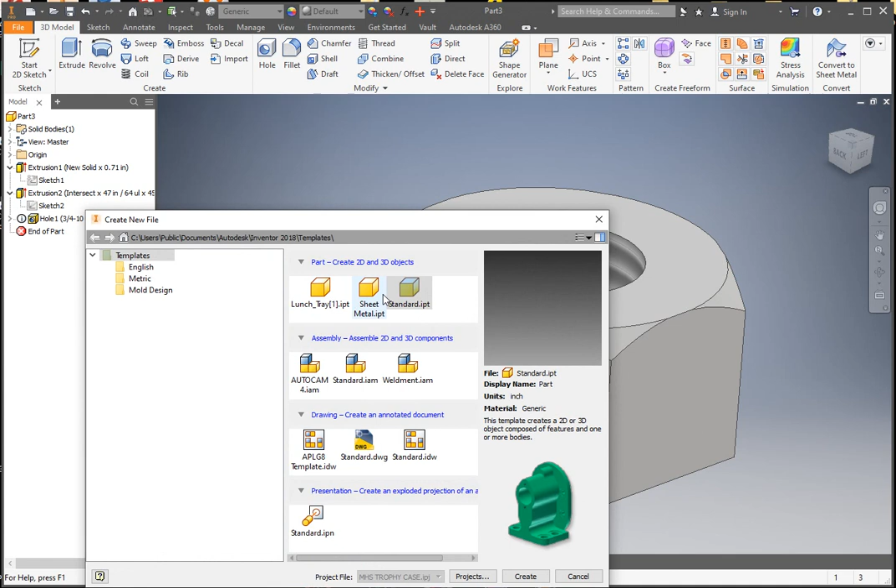All right, so let's take a look at doing this semi-finished hex nut. This is what we want to end up like. So to do this drawing, create a new standard IPT file. And we need to know a couple things. First, we need to know the dimensions.

So let's do a sketch here. I'm going to just rotate it around, and we're going to put in our six-sided polygon, right? Six-sided polygon. Don't really know the dimensions yet, so we'll just stick it in here. If you want to get it vertical, you can put a constraint on it.

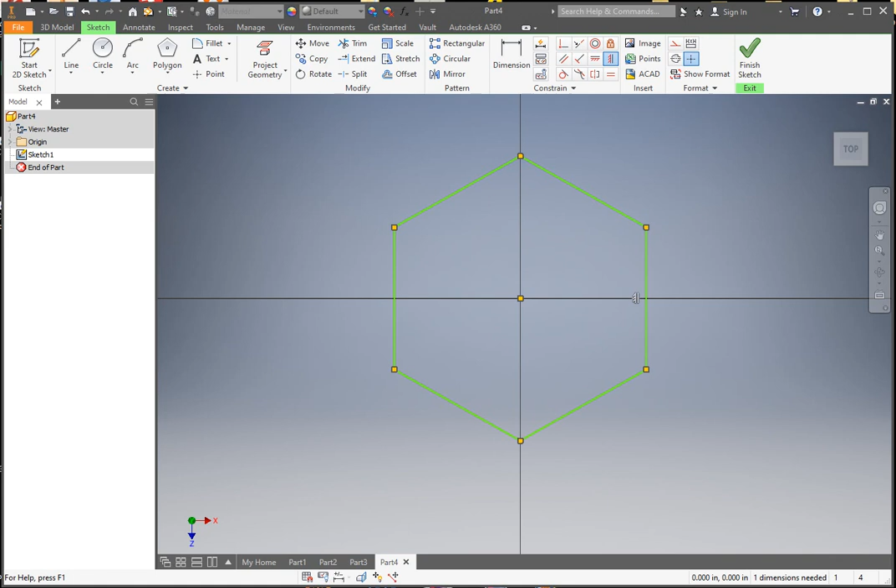That's fine. So all I did was go to the internet and Google semi-finished hex nut and dimensions, and came up with this little chart here. And we're going to be using this three-quarter nut, right? So our width across the flats, our F dimension here, is going to be 1 1/4, and our thickness is going to be 47/64 with a minimum of 0.71, maximum of 0.758. So it kind of gives us a little bit of variance there.

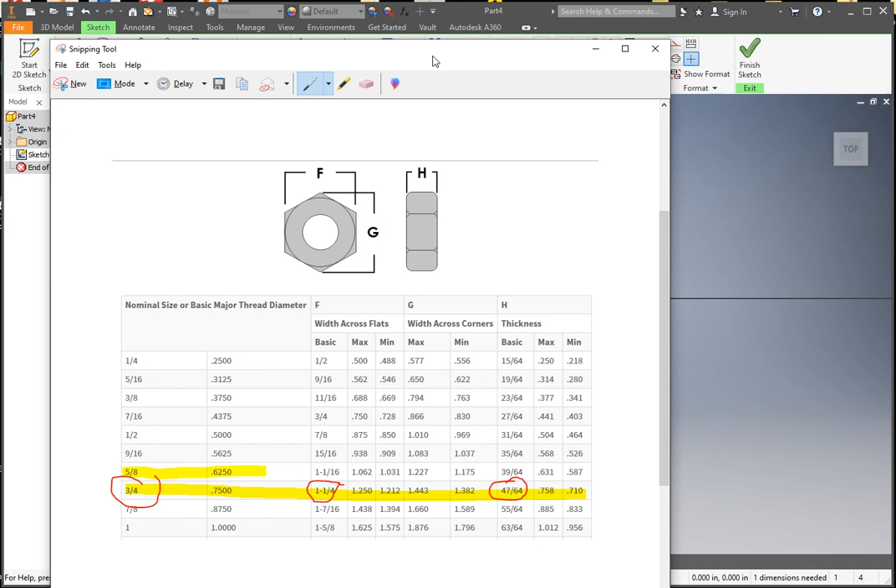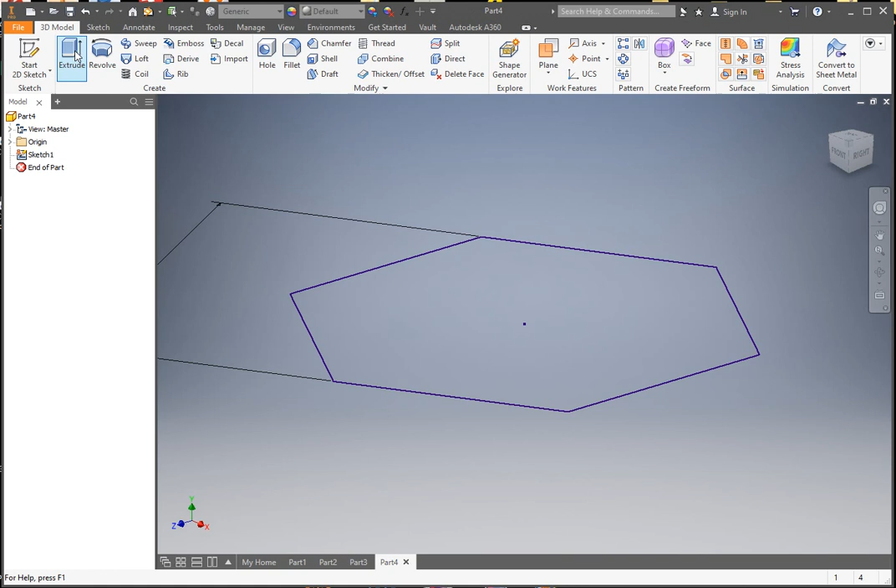So we'll start with these. So we know that across the flats is 1 1/4. So let's do that first. Dimension, flat side to flat side, 1.25, 1 1/4, right? So here is our nut. And our thickness, we finish this. Extrude. You can either put in the fraction, I'm going to put in the decimal, that basic dimension. Okay. So that's the frame of our nut.

Now we got to put on those little beveled edges. And this is the fun part. So we're going to sketch on the top. We're going to create a circle. And we notice in our drawing that it goes almost to the edge, right? So our circle is going to go to one of those flat edges. Be careful where you click it here. You could click it a little bit inside, but let's go all the way to the edge and click it like that. And we're going to finish this sketch.

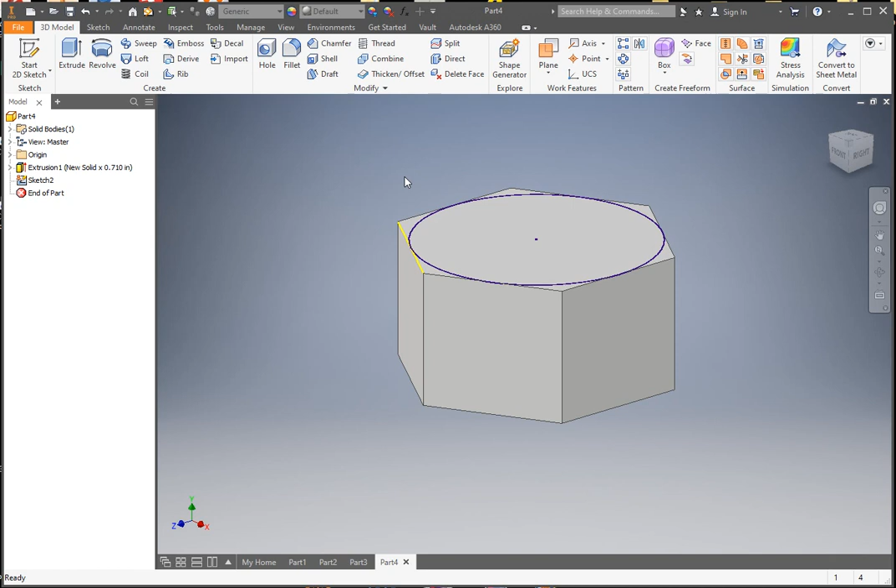Now, how do we get this chamfer here? So this is the way we're going to do it. We're going to create an extrusion for that center part. I can't join it or cut it all the way through, so I can't extrude it. That's not what we want. What we want is an intersection. Just this part here, cut.

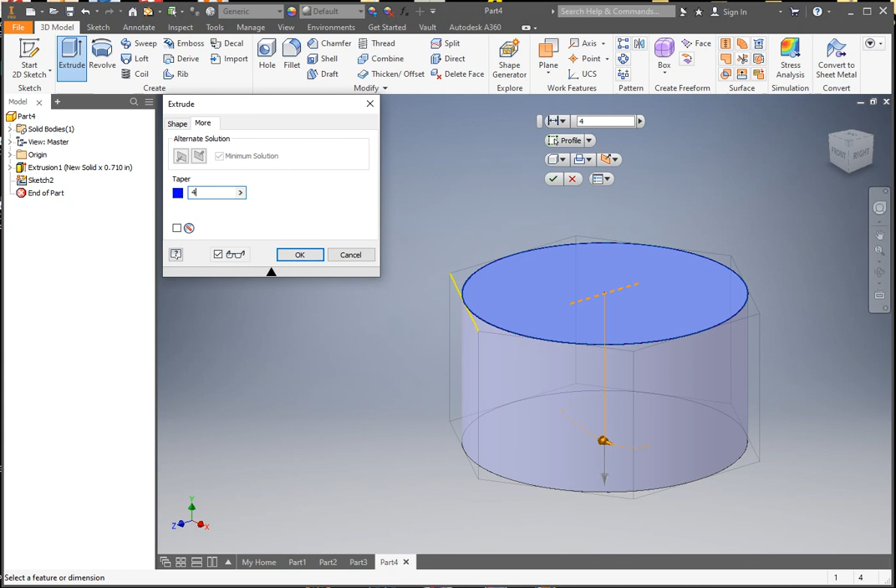But we want to go to the More tab and put it at a 45-degree taper. See where I am? 45-degree taper under the More tab. Hit OK, and that gives us our nice little extrusion. We can put an axis, you know, whatever you want.

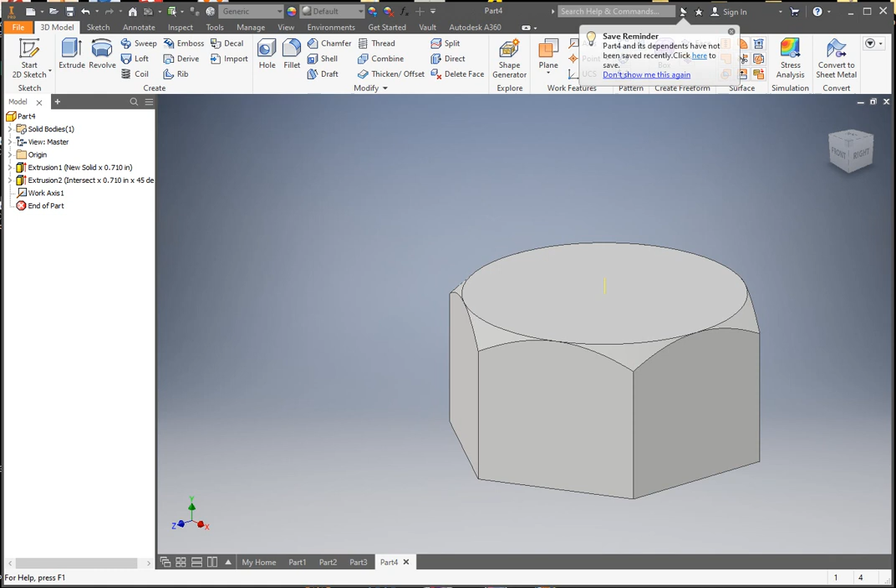Now we're going to cut out for the threading, and we know that our nut size is what? Let me increase that a little bit. Our nut size is 3/4 inch 10 UNC, Unified coarse thread, 2B.

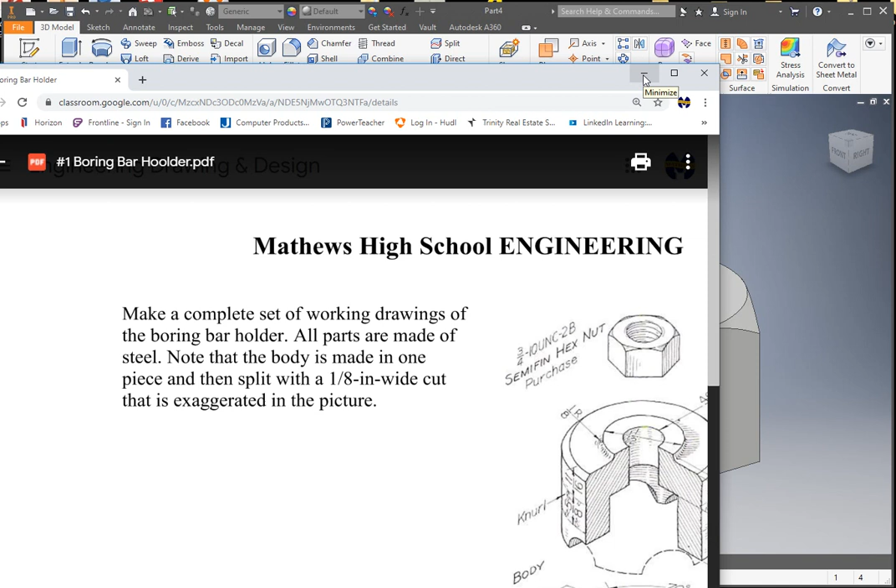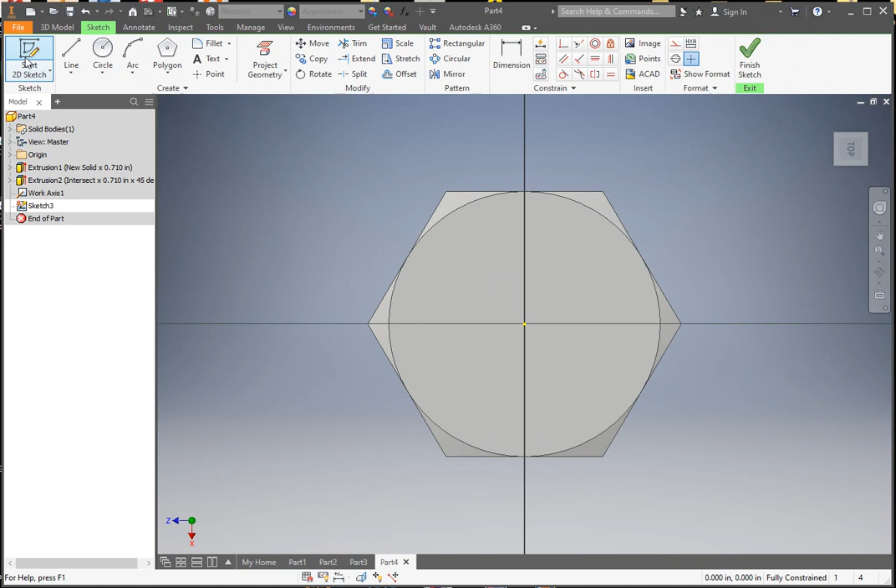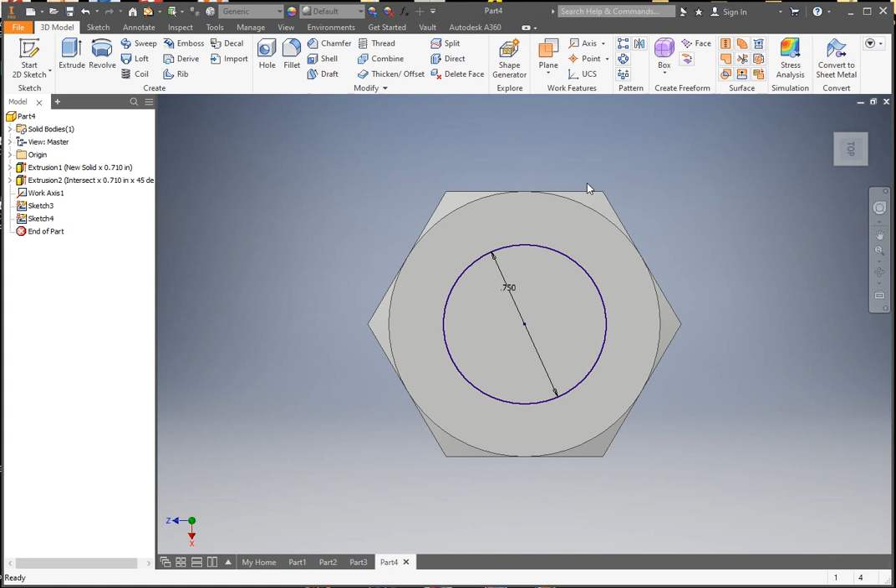Okay, so let's do this. It's a 3/4 inch hole, right? So we can create a hole on this face, right? It's not centered. So to create a center, let's sketch on this face, and we're just going to make a 3/4 inch circle. 3/4 inch circle. Finish sketch. Okay, so now we have a point that we can reference.

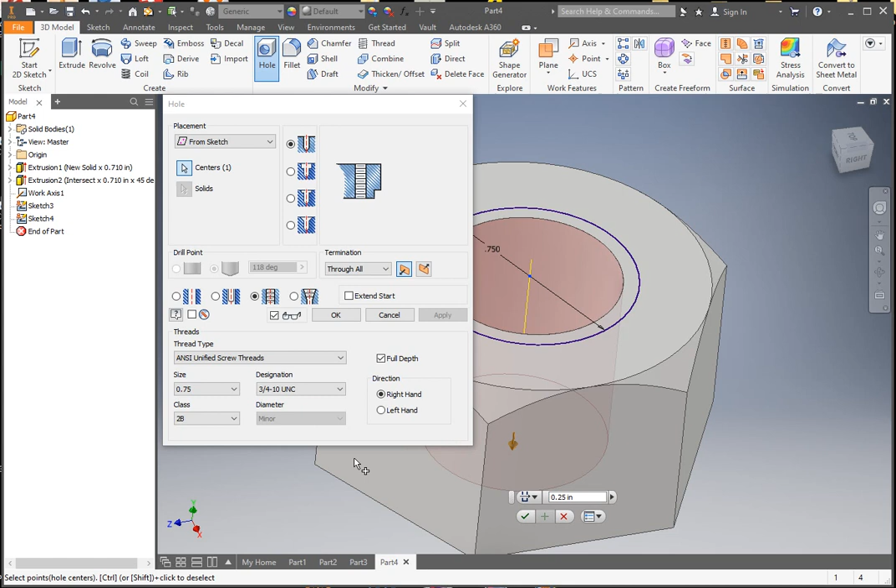Go to the hole. We're going to create a threaded hole. The size is going to be 3/4 inch. Go down, find 3/4, and make sure that we have the 10 UNC. Here's the 10 UNC, and it's class 2B right hand thread all the way through, full depth. Okay. So now we hit center, click the center of the hole, and hit OK, and it creates our thread. And there we have our nut. Okay? Have fun.